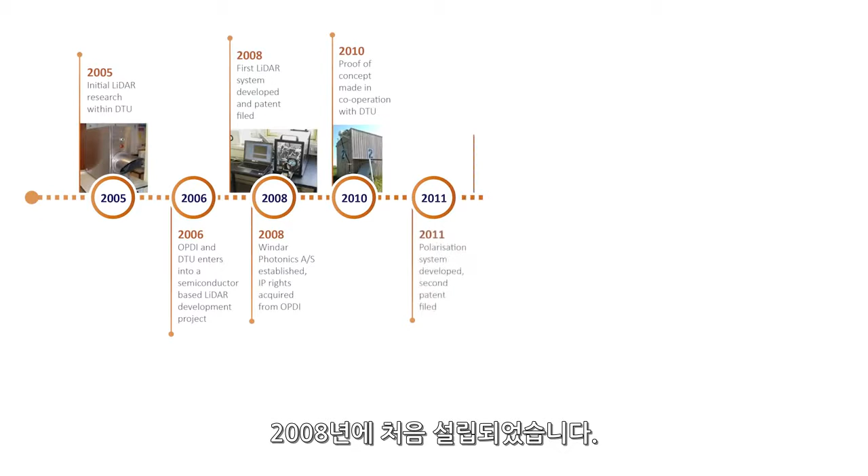Windar Photonics first saw the light of day in 2008 as a spin-off company from the Danish Technical University Risø Research Environment, where the basic blueprint for the cost-efficient LiDAR technology was initially conceived in 2005.

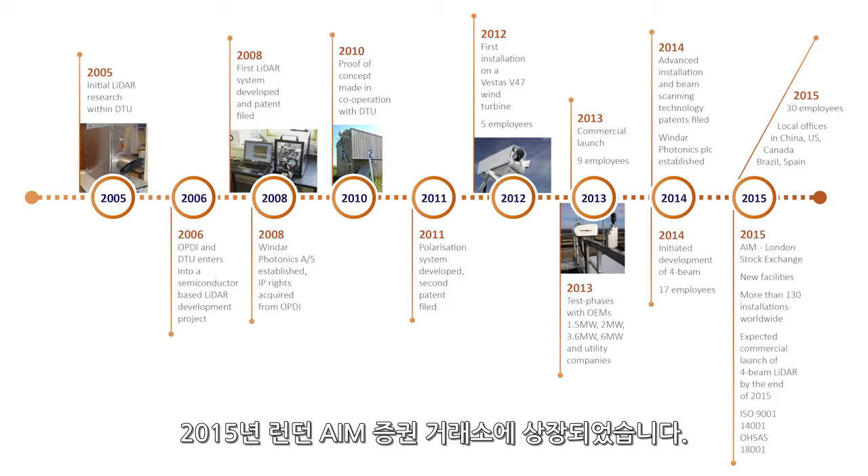In 2014, Windar Photonics was established as a PLC in the UK and listed on the London Stock Exchange AIM in 2015. Currently, Windar Photonics has done more than 130 installations of the Windar Photonics LiDAR optimization solution around the globe and established both sales and technical representation in the EU, the US and China.

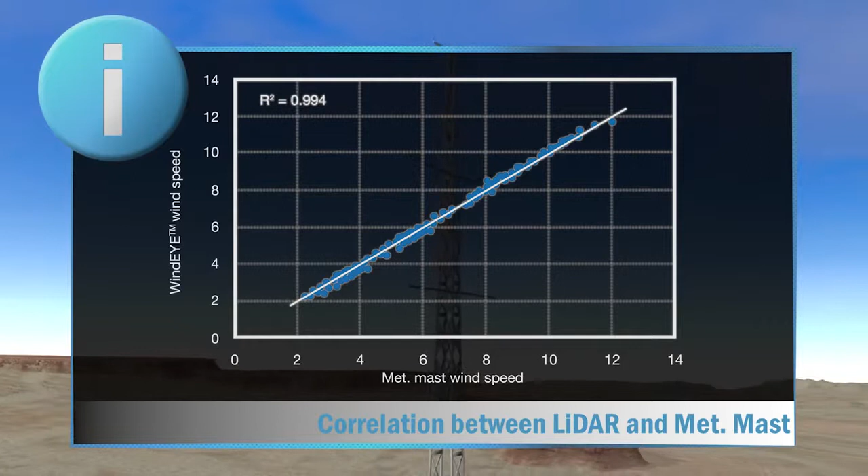The LiDAR emits two laser beams horizontally at a range of 80 meters in an angle of 60 degrees. The light emitted by the sensors measures the movement of tiny particles in the air and transmits the measured data to the wind turbine controller every second. Measurements validated by the Danish Technical University, DTU, have shown a precise degree of correlation between the measurements of the LiDAR and the measurements of a meteorological mast regarding both wind speed and wind direction.

The Windar Photonics LiDARs optimize the wind turbine by correcting yaw misalignment, which increases the AEP by 1.5% to 2% on average, and in some cases even by as much as 4%. Furthermore, the Windar Photonics LiDARs will alleviate damaging loads on the turbine, enhancing the lifespan and uptime of the wind turbine.

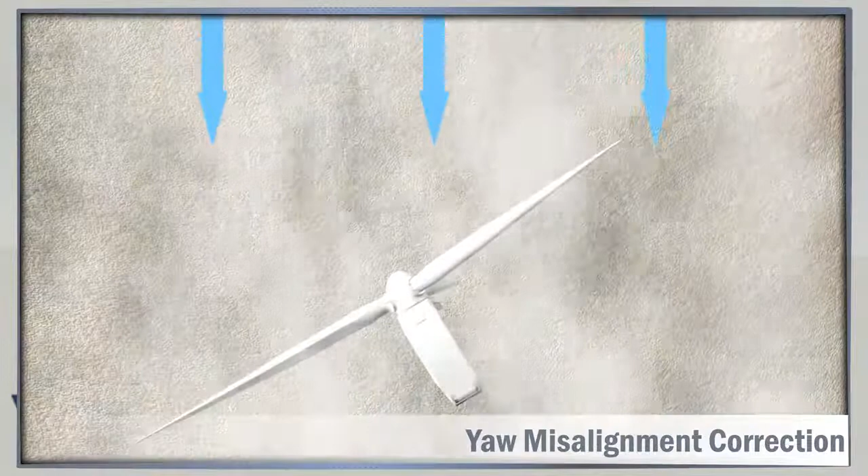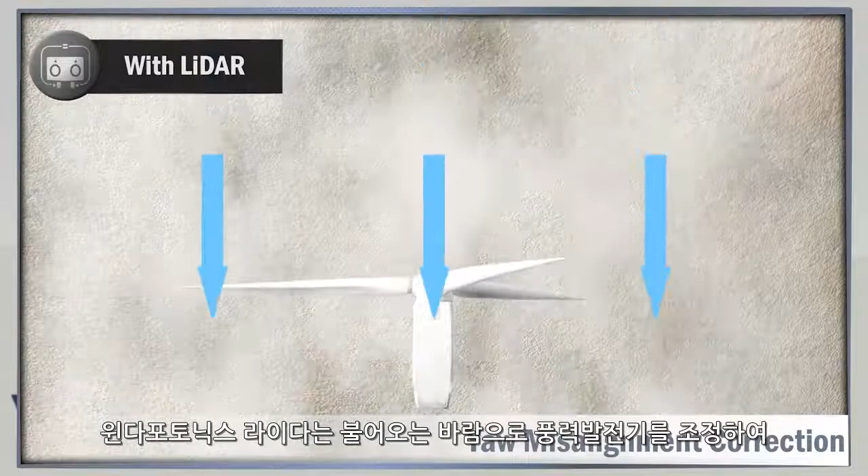Most turbines have some degree of yaw misalignment, which results in the turbine being subject to potentially damaging loads and a suboptimal energy production. The LiDAR precisely aligns the wind turbine to the oncoming wind, significantly reducing the loads associated with yaw misalignment on the turbine.

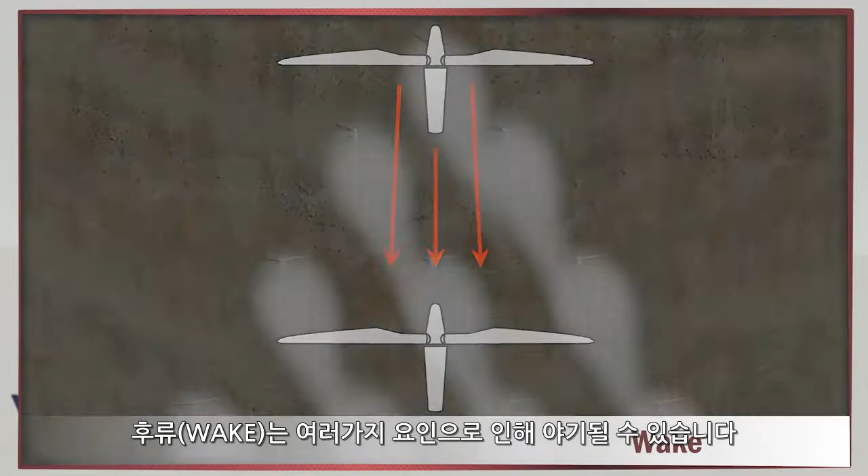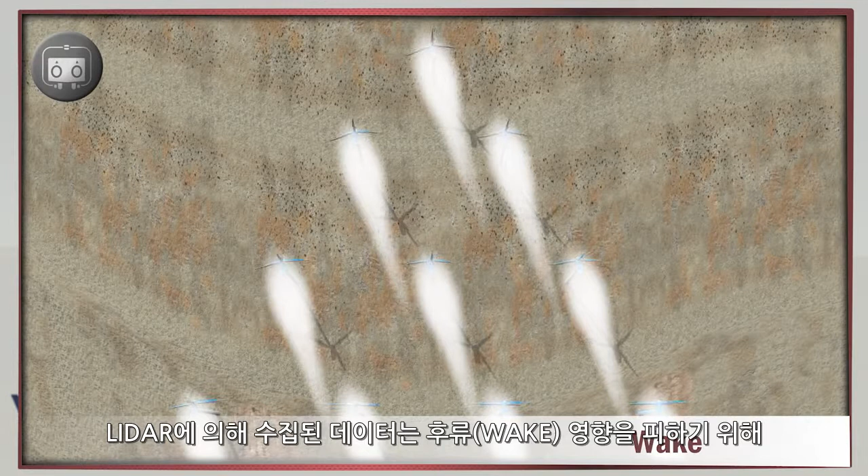Wake situations can be caused by several conditions relating to the wind turbine's environment. Wake is often caused by the distortion of the wind flow from nearby wind turbines, essentially increasing the loads on the affected turbines. The LiDAR can detect wake by tracking the changes in the signal shape between the LiDAR's beams over time. The data collected by the LiDAR can be applied to adjust or regulate the relevant wind turbines to circumvent the wake situation.

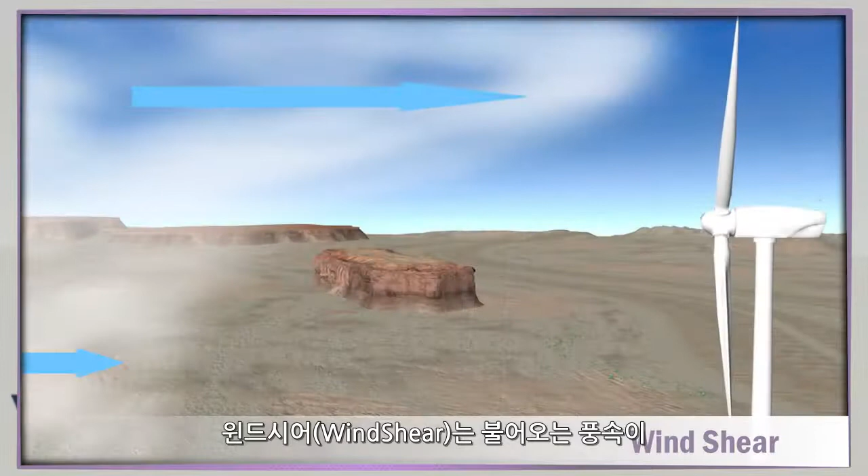Wind shear occurs when the wind speeds vary significantly at different altitudes, causing the wind turbine rotor to be subject to vastly different oncoming wind speeds, which will cause even more strain on the turbine in general and specifically on the rotor and the gearbox. Due to the WindVision's ability to measure the wind speed at various altitudes, the LiDAR is able to detect wind shear, which can subsequently be alleviated through the turbine's controller.

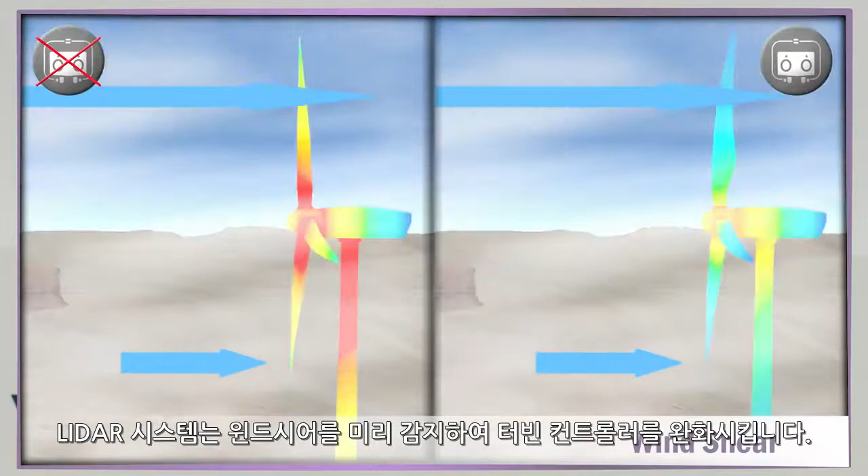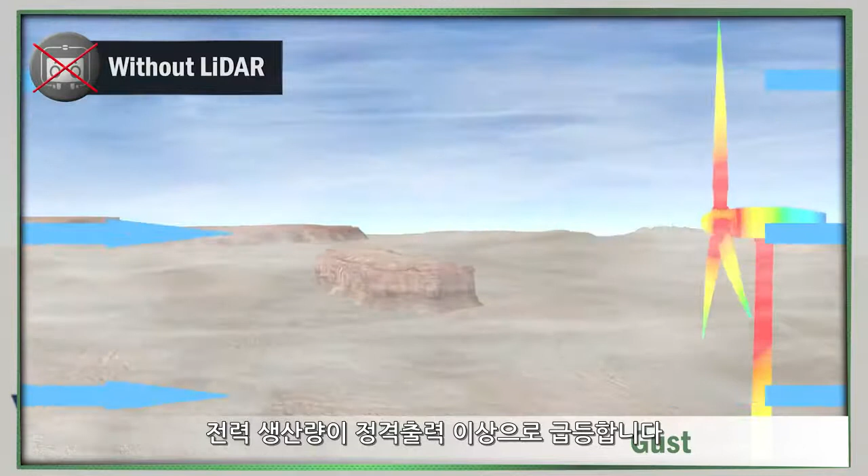Gusts are essentially substantial variations in wind speed within a short time frame, where the wind speed suddenly increases before reaching the turbine and causing the power production to spike above the rated level. The LiDAR's gust detection can potentially anticipate gusts, allowing the turbine to pitch preventively, hence averting the increased loads and power spike.

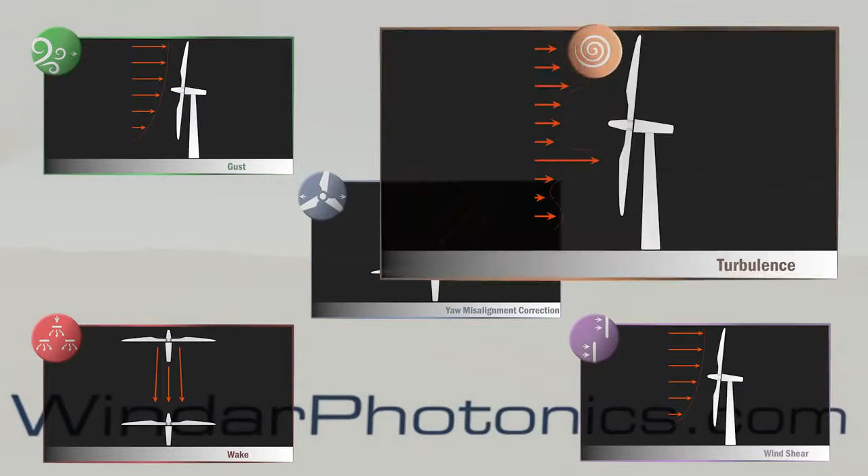Utilizing complex algorithms, the LiDAR is able to detect turbulence and store the data for later analysis. The data can provide a basis for further load optimization of the turbine by the wind turbine owner.

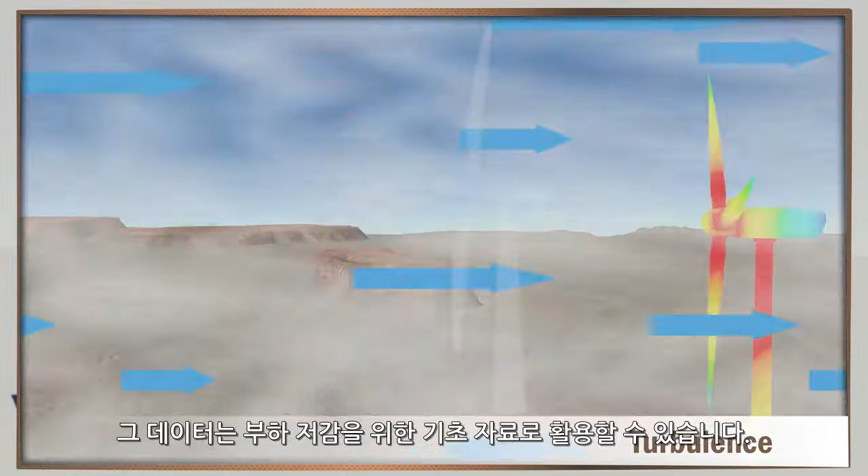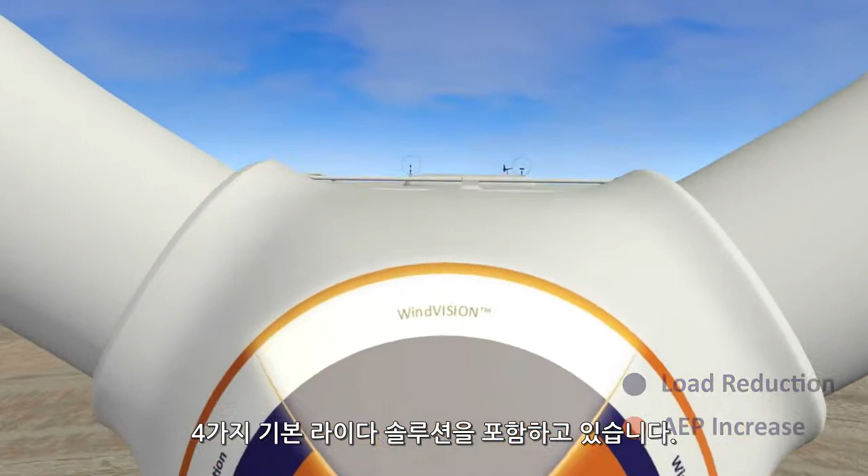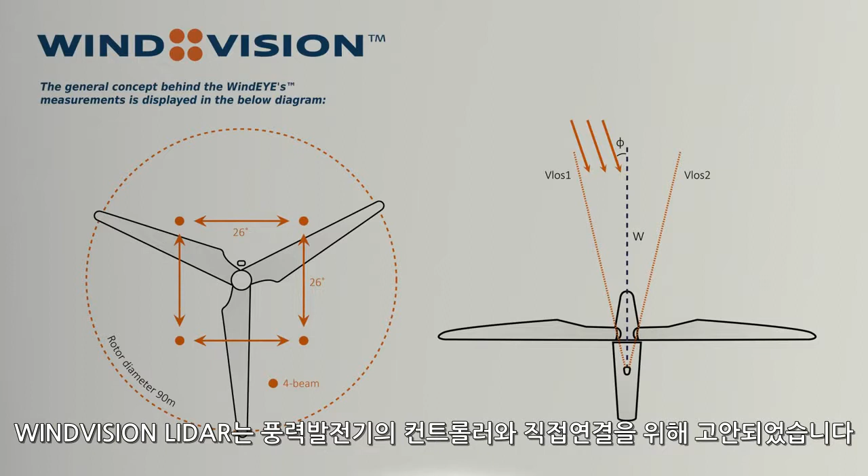The Windar Photonics product portfolio currently includes 4 different LiDAR solutions that have their individual strengths and advantages, depending on whether the LiDAR needs to be installed as part of the design process or as a retrofit solution. The WindVision is a complete optimization strategy for yawing, pitching and detection of load-increasing phenomena. The WindVision LiDAR is intended for direct integration with the wind turbine controller. The four beams allow the LiDAR to measure in both horizontal and vertical planes, which enables the WindVision system to detect wind shear.

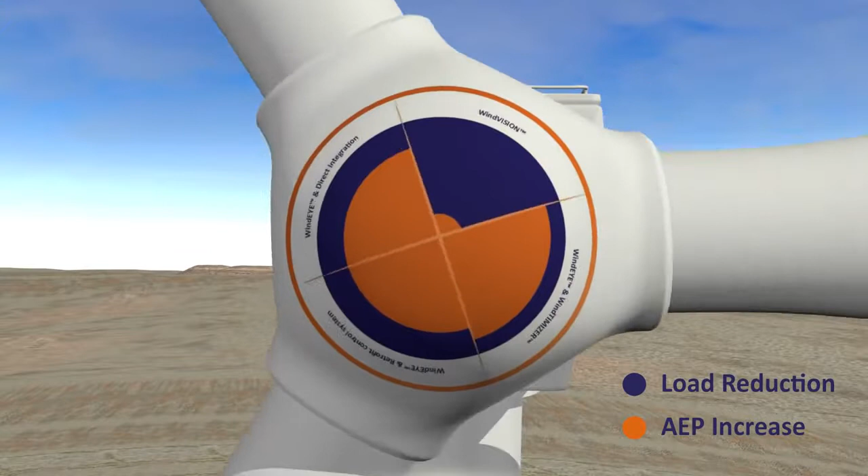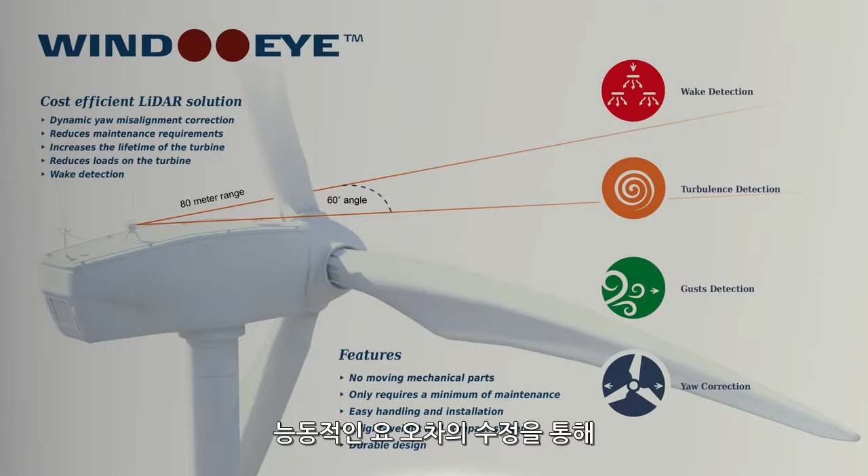The Windar Photonics LiDAR ensures a continuously well-aligned wind turbine, which is subject to fewer damaging loads, through dynamic yaw misalignment correction by measuring the wind in front of the turbine. Additionally, the WindEYE can detect gusts, wake, and turbulence. The WindEYE can be directly integrated with the wind turbine controller as part of the design stage.

The WindTimizer is a mediator that allows the WindEYE to be integrated with the wind turbine controller in cases where direct integration is not an option. Utilizing the WindTimizer enables the LiDAR to perform dynamic yaw optimization.

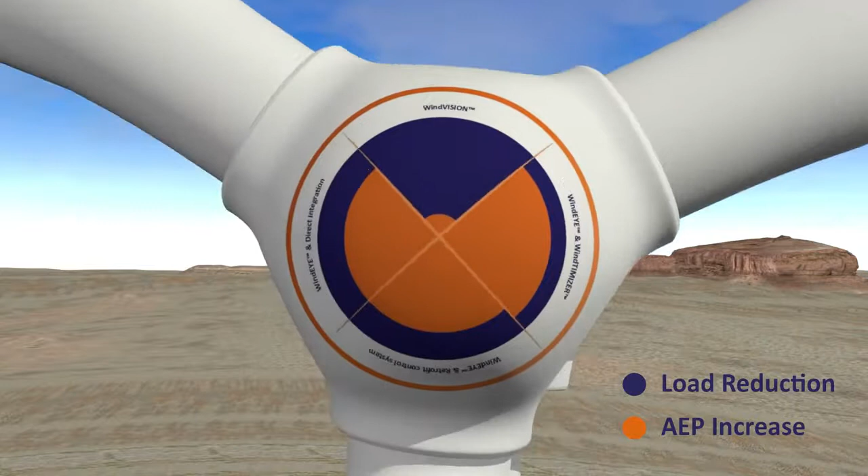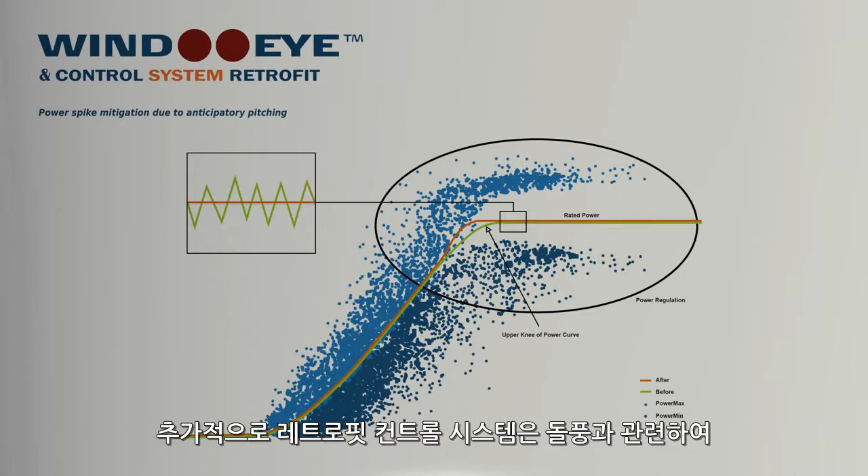The retrofit control system is an optimization solution intended for older assets that can benefit from the combination of a new control system and a LiDAR sensor. Additionally, the retrofit control system allows the wind turbine to perform anticipatory pitching in relation to gusts.

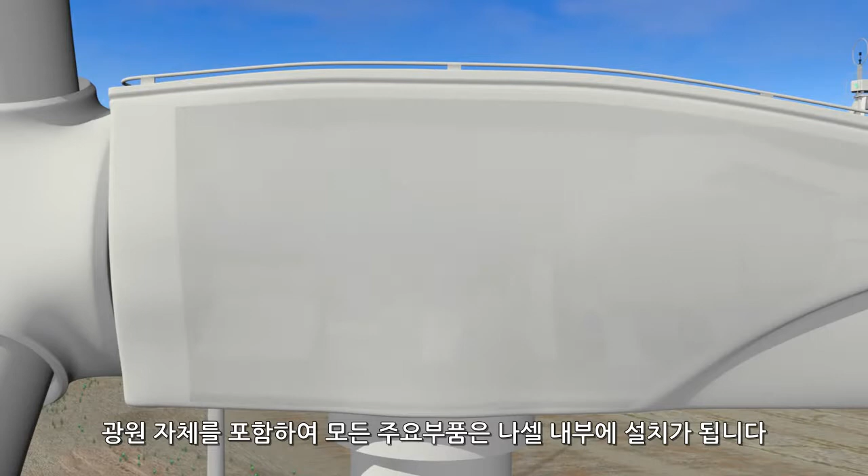Because of the compact and lightweight design, the installation of the LiDAR can be done in less than 6 hours and requires no special hoisting solutions or cranes. The system contains no mechanical moving components, and all vital parts, even the light source itself, are installed inside the nacelle. As a consequence of this, the parts outside the nacelle require almost no maintenance.

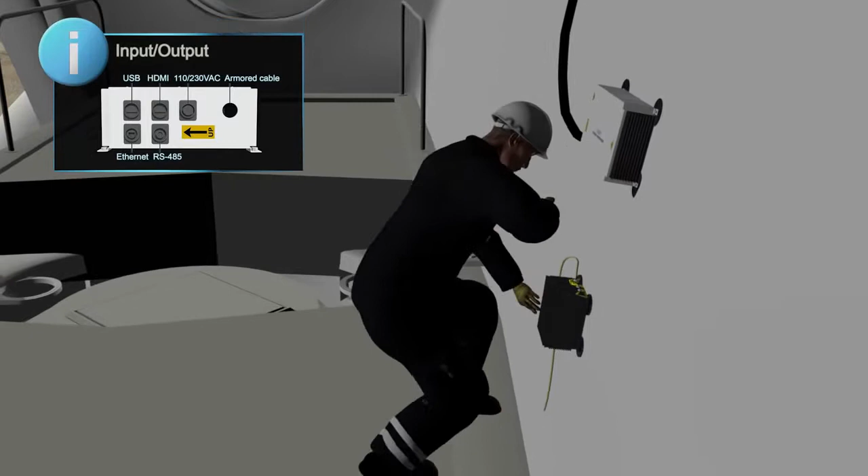The system keeps a high degree of data availability in all climates, even during heavy rainfall. The LiDAR is IP66 protected, and the special coating and anodized aluminium construction will let it survive all possible weather conditions. The lightning bracket, specifically designed for the LiDAR, guarantees that the LiDAR is properly protected against lightning in the lightning zone 0B. The specially developed vibration system ensures that the LiDAR can operate in a vibration range of 1 to 500 Hz.

The LiDAR has been developed to be operational in even the coldest environments and will function in temperatures as low as -40 degrees Celsius. The special heating elements will prevent ice from being formed on both the windows and on the outside of the unit. The Windar Photonics LiDARs have been installed on more than 100 wind turbines and will benefit most turbine models in any climate.

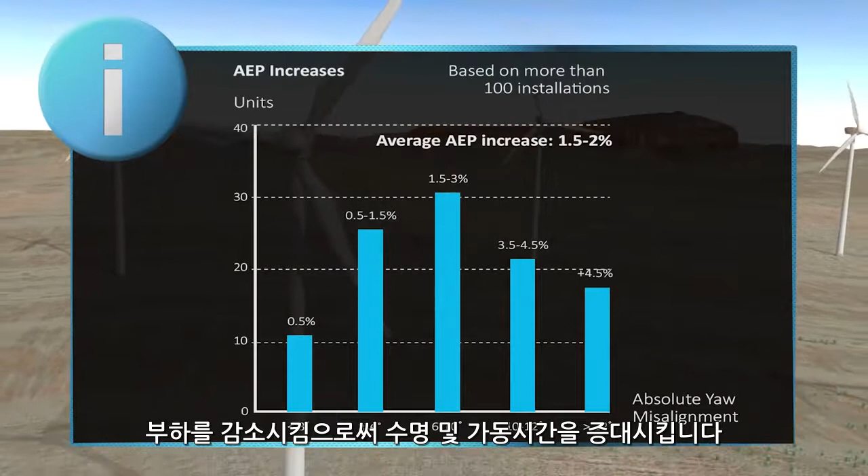The Windar Photonics LiDAR optimization solution is very cost-efficient and will help reduce loads on the vital parts of the wind turbine, hence increasing the lifespan and the uptime of the wind turbine. Furthermore, the LiDAR will yield increases to AEP by as much as 1 to 4%, providing a fast return on investment for the wind turbine owner.